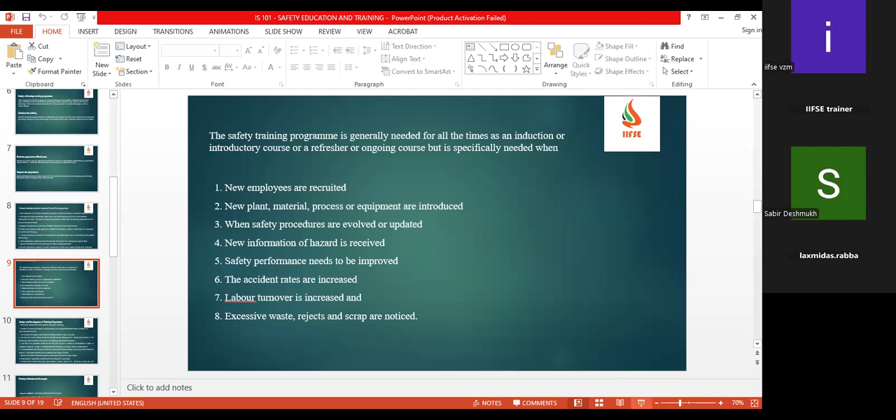Okay. We are discussing the special cases that require training programs. As we see, new employee orientation; in case of any new process, new plant or new material which is introduced into the existing operations; any changes in the safety procedures or any updates about the hazards; and also in case of declining or not meeting the safety performance requirements, or the safety performance is not up to the mark; the increasing of incident rates; and also labor turnover, where people keep changing or rotating.

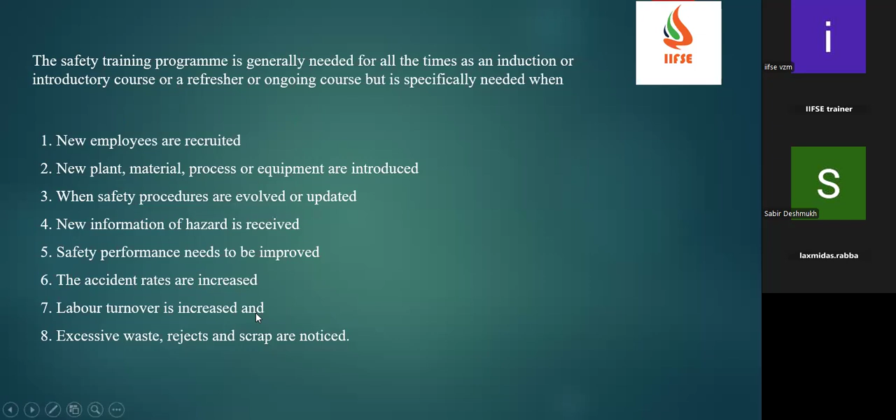Then excessive waste, rejects and also scrap are noticed. Excessive waste is not related to safety, but it is related to environment. Any rejections happen or more scrap is generated. In these certain cases, specifically, we need to conduct the training programs.

Now we'll see how the training program can be designed and developed. There are various things we have to keep in mind while designing and developing a program. Motivation should be the first condition of any type of training. There will definitely be a motivation behind the training program. Motivation is nothing but the goal and objective of why we are doing this training program.

The number of lessons and the content to teach should be well designed ahead of time, and the steps or sequence of topics should be decided. What are the various topics or lessons, what kind of content you are going to discuss or present to the people, should be ready before, and the sequence of topics and steps should be decided. If you're doing multiple topics, what is the sequence of topics?

How are we doing it now? We started with management, then we have seen the principles, and we have seen the functions of management. Out of the four functions, we have seen organizing, staffing, directing, and controlling. Then we went into the trainings. That is how we have to sequence the content or topics which you are going to train.

Then the amount to be taught in a unit period should not be too large or too small. What is the quantity of material you are going to teach, or the content you are going to cover in a certain period? For example, if you have a half-hour session, you may do one topic. If you are planning a one-hour session, you may plan for two topics. In such a way, the topic load should not be very low or very high. It should be moderate.

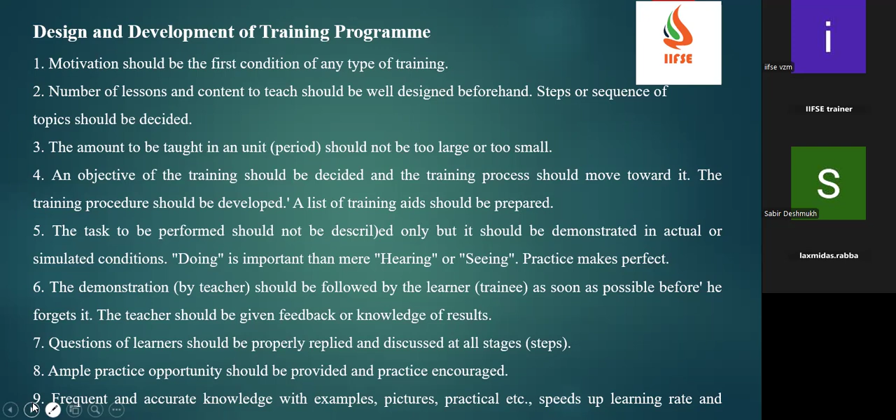Now we'll see the various methods and strategies for training. Basically two methods are there. One is the theoretical or formal classroom method, which we do in our education from first grade to the completion of our graduation or masters. Then practical or informal training at the job place, where we do on-the-job training. Once we have completed our graduation, we'll go for an internship or training. There we perform the job on our own and get hands-on experience.

And there are basically two basic goals. One is to enable the workers to know the job and to do it correctly. Another one is to be certain that he knows how to do it correctly. These are the two basic goals behind the training: what he has to do and how he has to do it correctly.

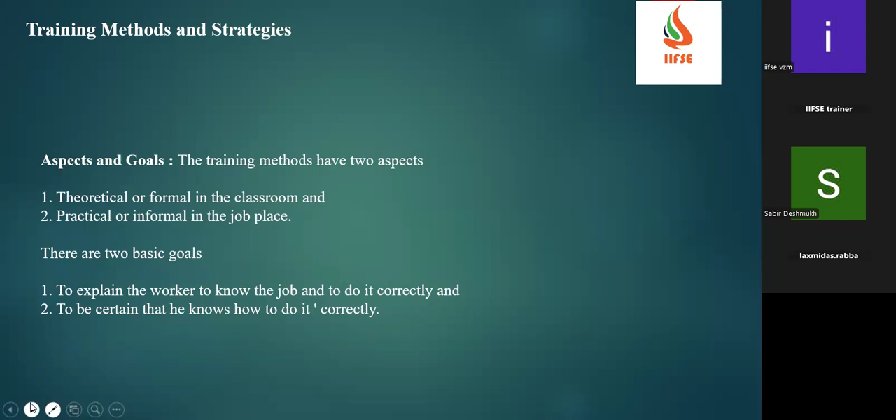Now we'll see the various methods of how training can be delivered. The first one, which I'm doing, is the lecture method, then the discussion method, the case study method, the role play method, and sending people to training centers, where a person will go to the training center and stay there for one or two days, based on the training program, attend the training and come back.

Now we'll see the lecture method. It is the oldest and most basic method. Well-planned lectures can cover a large amount of information in less time and are more useful when participant involvement is less required. For example, in seminars hundreds of people will join, and the involvement of participants will be very less. The speaker will come, give the seminar and go. So there the lecture method is very suitable.

The discussion method is useful with a small number of people in a group. So maybe the discussion method is more suitable in our case, so in between we'll discuss. There is a small set of people, not a large number; we are just 30 or below 50. Then the case study method. An accident case study is presented explaining how an actual accident happened or how an imaginary accident can happen.

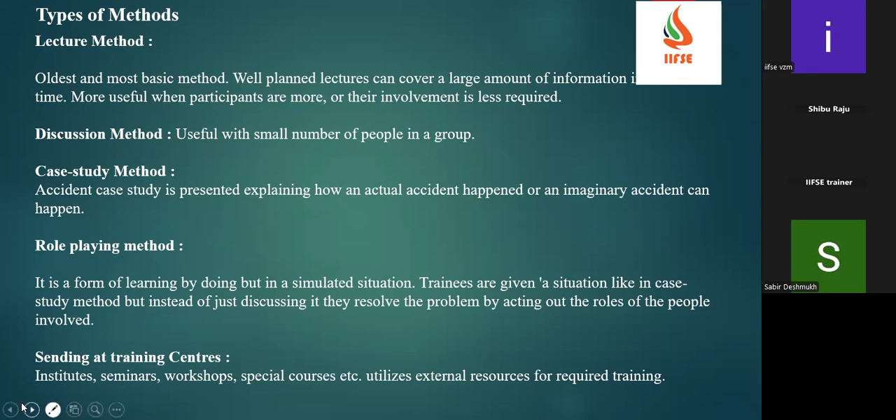Then job instruction training. This is another method. It is useful to train the supervisors who in turn train the employees. So this is basically given for the supervisory level of people, who are going to train their subordinates. Then preparing the trainee, how we have to prepare the trainee. So prerequisites of training: before attending a job, what kind of basic requirements the trainee should have, or the minimum things or basic instructions he should know.

Then demonstrating the job. If I take an example of assembling a small engine, the supervisor will demonstrate and have the trainee perform the job. We'll give some time to perform the activity, then frequently check the trainee's performance. So we'll prepare the trainee, demonstrate the job we expect the trainee to do, then the trainees will do the job, then we'll do frequent supervision on how they are performing. That is job instruction training.

So this can be related to safety as firefighting training. We have a fire commander or safety officer who gets the training additionally or externally, like you people, maybe practical training. Then you will be training your identified firefighters. So before training, you will explain what is meant by fire, or the fire triangle or fire tetrahedron.

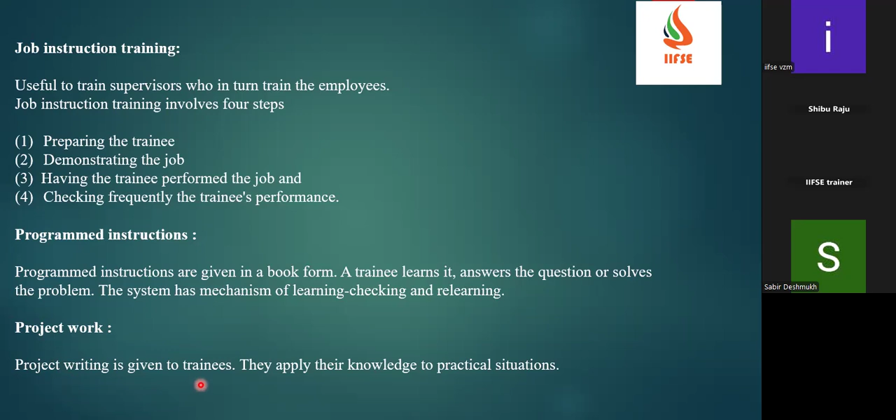Then project work. So the project work is given to the trainees. They apply their knowledge to a practical situation. This is also one kind of training where we give an opportunity, or where we give a problem to the trainees to solve. Okay. So that is about the methods of training.

Now we'll see what are the types of safety training. So if you see safety training, there are formal and informal. A formal training may be general or specific. If you see the general trainings, what all will be included? Induction course for the new employees, ongoing safety training, which means based on the safety training calendar. So monthly or quarterly, based on the calendar, it will go. And the safety representative training.

So safety representative means what? Safety stewards or safety champions or safety committee members. For them, we do training programs. And supervisory training. So these are the first line supervisors, especially for the shop floor. And senior and middle management training program. So we do for them also. Senior and middle management, basically, we do on mock drills and fire drills.

And also we do on emergency situation handling, how they should act, like site controller or incident controller. What is the role of first aid coordinator or firefighting coordinator or evacuation coordinator, and what will be the role of a liaisoning person in case any emergency situation happens, how he will coordinate with the government officials and also the peer companies to get their support in terms of ambulance, any firefighting materials, or any fire tender support.

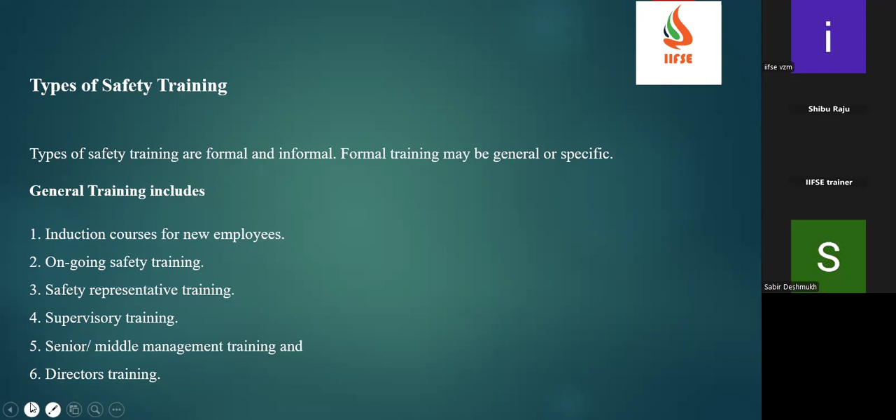Then directors training. So this directors training will be in terms of compliance with respect to the latest legislations, etc., high level. Then with respect to specific trainings, maybe a safe system of work, which is nothing but the work permit system, or particular operations or any potential hazards which are high, and also where guarding is not feasible. Maybe some kind of situations where there is no safety control at all. So there, for example, if you see hazard hierarchy control,

Anybody knows hazard hierarchy control? Any guess? Here, sir. Yes, sir. Okay. Elimination, substitution. Engineering controls, sir. Administrative controls. Mm-hmm. PPE. Okay. Which is most effective and which is least effective? Elimination is the most effective, sir. Least is PPE. Okay. Perfect.

So for the sake of others, basically there is a hazard hierarchy control. Hierarchy is nothing but the flow you should follow, who should come first and who should be last. If you see, this is the least control because it is very sharp, and here there is a huge place, this is the large control, which is very high. So here we'll start with the elimination.

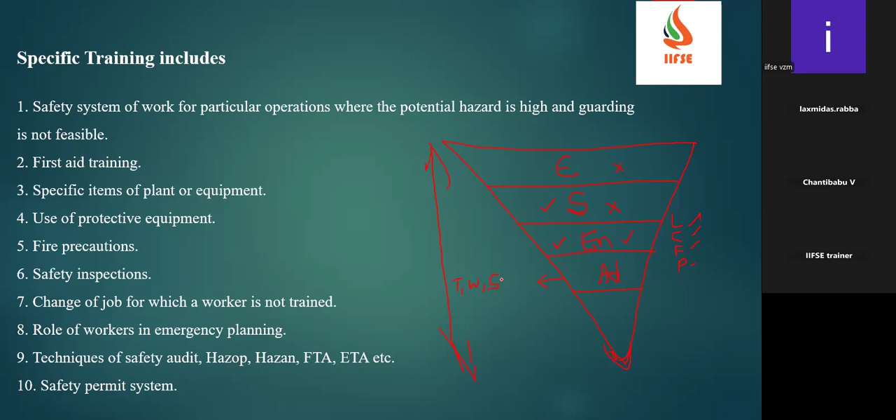So in administrative control, what comes? We'll get trainings, then work instructions, then standard operating procedures, SOPs. Then we'll have posters or signages for do's and don'ts. Then we also have supervision. So these all fall under administrative kind of control.

And the last one, which is PPE. These are elimination, then substitution, then engineering, then administrative, then PPEs.

In this, any role of the barrier? Barriers all come under engineering controls only. Safety signage boards are administrative controls. Even barriers, sensors, auto cutoff, emergency stop buttons, exhaust system, scrubbing system - whatever kind of control is coming, it will come under engineering controls.

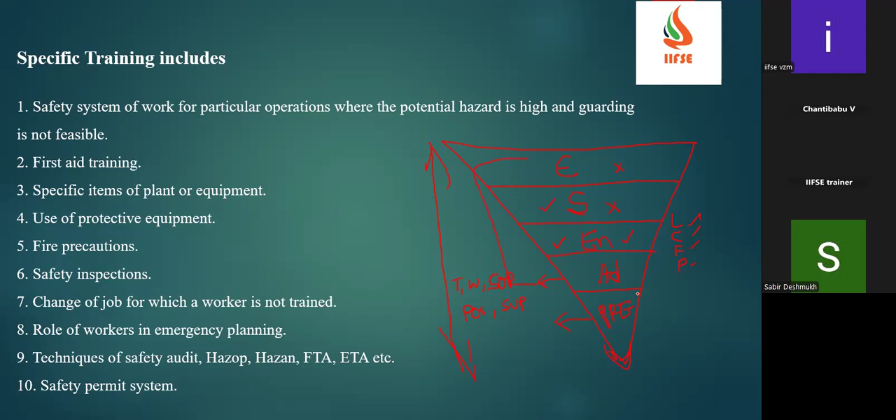Then PPEs, which are suitable - this is the last resort. If all these controls fail, this is the last one. At least they can safeguard themselves, they can immediately go away from that immediate vicinity. This is how we have to do it - once you have identified a hazard, you have to follow the same approach. Then only we can minimize the accidents.

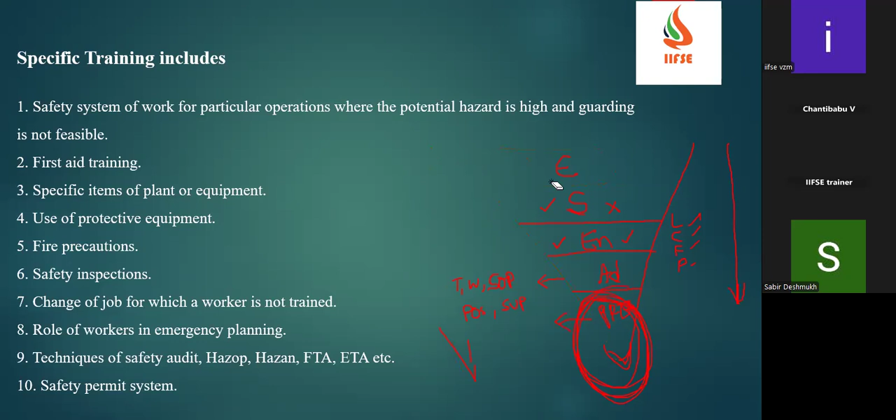Okay, good. Basically, it covers another topic, but we had a chance here itself. Hope this topic is clear, right? Hazard hierarchy control. Okay. We have another 7 minutes. Fine, we can finish it.

Then specific trainings are first aid trainings and also specific items of plant or equipment. I can say usage of SCBA, self-contained breathing apparatus, or any specialized PPEs, fire hydrant system or fire hydrant equipment, and use of PPE and fire precautions and safety inspections, change of job for which the worker is not trained. In case job rotation happens, then there also we need to have a specific training program. A role of the workers in emergency planning in case of any emergency happens.

Then techniques of safety audit - HAZOP, HAZAN, FTA, ETA. So hazard operability study, hazard analysis, fault tree analysis, event tree analysis. These all are accident investigation techniques. Then HAZOP is the process deviations study for manufacturing processes. Then safety permit system, which is nothing but work permit system.

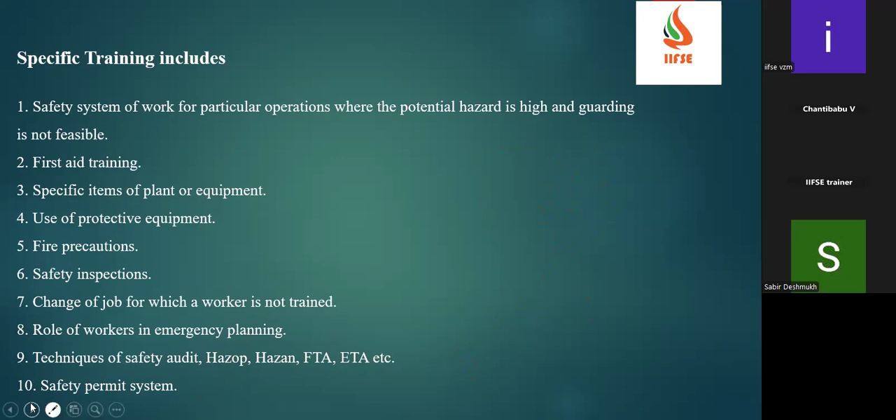Then how will we evaluate? We have identified the need, assessed it, defined the goals and objectives, and conducted the training program. The training is done. Now we are doing evaluation of the effectiveness of the training. How will we assess that effectiveness? There are various areas where you can see or observe the effectiveness.

One is increase in quality and quantity of production. Yes, everything is coming well. Previously there were so many rejections, now there's an increase in production rate.

In our case, what do we say? Reduction in accident rate, increase in reporting of near misses, increase in knowledge, skill and ability about job performance, like compliance with safety requirements. Increase in job satisfaction and motivation, so no injuries, everybody comes happily and goes happily. Decrease in accident rate - yes, all of it is covered.

Decrease in production time, breakage or usage of consumable items. Then decrease in absenteeism, decrease in labor turnover - no more people keep changing. And decrease in job turnover, decrease in operational cost, or refinement of human behaviors towards intended objectives and goals, safety outlook interests, and also safety mindedness, production quality and orientation.

So these are the various points we can observe about the training which you have conducted. If you conducted a training program about near miss reporting - previously there was no near miss reporting system at all, now you have started a training program - now we are getting monthly 200, 300 near miss reports.

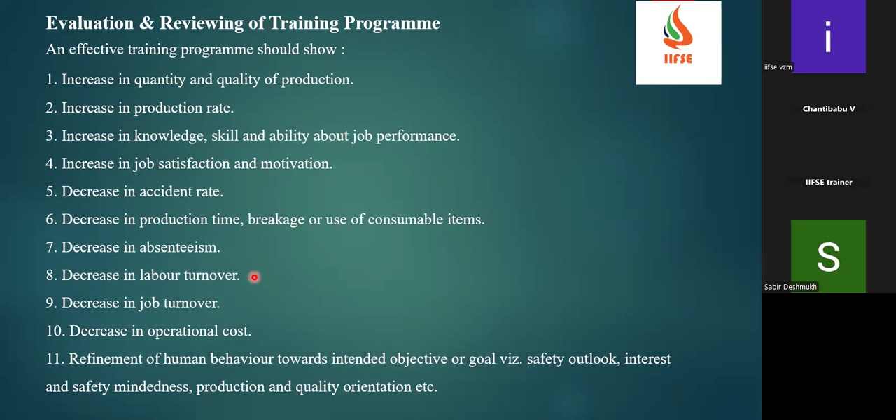Before, there was no safety suggestion system. You started giving safety suggestion training, put up a safety suggestion box, and made a small template to fill the suggestion. Now you are getting safety suggestions. By these two activities, a number of hazards that were leading to accidents are addressed beforehand. Automatically, the accident rate will decrease. That is also one kind of evaluation of training - you can see the effectiveness.

The last one is competence building technique. It is nothing but, instead of theoretical training, how you are building the competence - which means the confidence gained from the training you have conducted. The basic objective of any training is to generate or build competence in the participants. What is meant by competence?

We used to call it a competent person. Have you heard about a competent person? Yes sir - it is the capability to do work which is assigned. Or he has mastery in that, so he can perform the job properly.

Who has authorization, who is trained, who is skilled to perform certain jobs - for that, authorization is also needed. In our case, competent persons conduct calibration of our tools and tackles, lifting tools and tackles. He is authorized by the inspector of factories, government authority. He has such qualifications and has authority to perform various jobs like testing, inspections, giving certificates, and also some third parties have authorization for conducting safety audits. That is how it is.

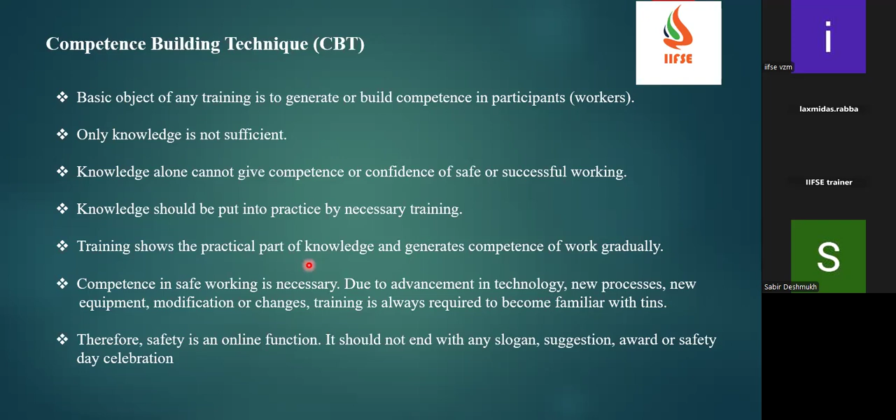We have less than a minute. So basically, apart from theoretical knowledge, we should give some practical knowledge. We have to give some time to practice the skills gained from the theoretical concept, so that they will get the confidence automatically.